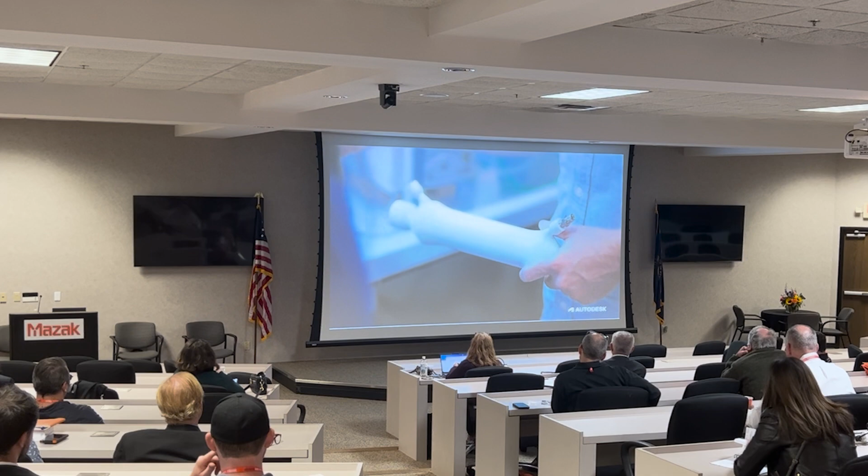That shows a little bit of the breadth of the company. The other reason I started with the video is that early in my presentations I also have to show this—it's not quite as fun, but I'll put it in layman's terms, what makes sense to me: it's the Autodesk Safe Harbor statement. Basically, it tries to keep our salespeople honest. As a company, we want to be transparent about what we're doing, but we also can't sell futures. So it's this interesting balance between being transparent and not having somebody buy something that's not yet built. All this means is if I tell you something about what we're doing or share an opinion, it's not a commitment on Autodesk's behalf. It also means you can ask me whatever question you want, and I can answer it, because you just saw this slide.

So I hope that we keep this conversational. It's a good way that we can stay transparent and also make sure that we don't end up in jail for selling futures.

Okay, so Autodesk—I told you a little bit about Autodesk, and I really don't want to make this an Autodesk commercial, but it's hard because all my slides have Autodesk stuff in it. I think it will refer to the software industry in general and show a little bit about our perspective, because we have three major verticals at Autodesk.

The one that people with more gray hair would know us for is architecture. It's how I used AutoCAD in high school probably. That's certainly where we started 40 years ago and have a significant amount of market share there.

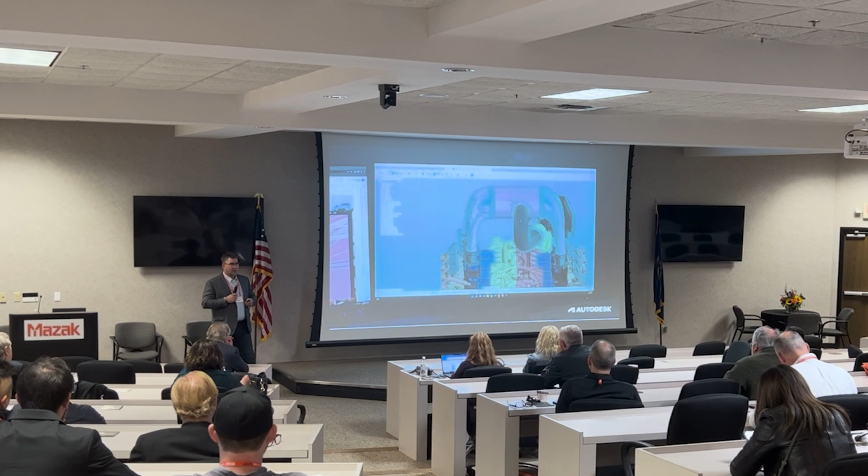Whenever I think about change being disruptive, I think back to college drafting, where I actually got my worst grade in college—which is weird because now I work for Autodesk. So many strange things in my career went ways I didn't expect. But that drafting teacher told me parametric modeling is the worst thing that ever happened to the draftsperson. And to some extent, he was right.

If you didn't want to change, you'd spend your life figuring out how a front, top, and side view line up with each other. But with parametric modeling, the world started to change, and draftsmen started to think about their design intent and how they captured it—we automated away the creation of the three views.

So each time there's a step in automation, it creates an opportunity for us to do more. That's a challenge—for some people it's exciting and you can attract new talent, for others it's a fear we have to get over.

The video I showed here was a bunch of guys who loved racing, and the fact that the product was more accessible was a change in their industry—they were able to design their own products for racing. In the background there's a Hooligan Pikes Peak car they did using Fusion. So it creates this new opportunity for new people to get involved, and I think it's an exciting change.

This one's kind of a funny one for me.

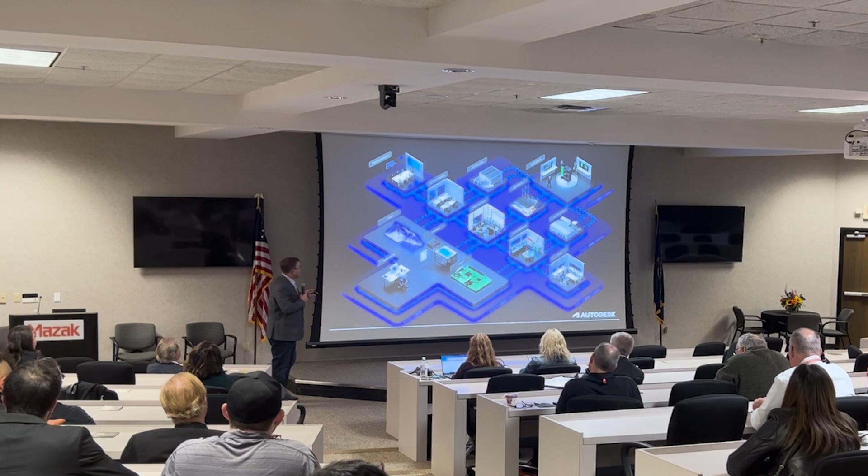So this is kind of the perfect world that we see. It's the one and done of the software world. Can everything be talking together seamlessly? The reality is, it's not.

This is what the world looks like today. Some of these products are ours, some are other people's, but as an industry we basically said, here's all the parts, figure it out on your own. We spent all the time making the toolpath that would do the fanciest thing and having the simulation that shows when something's bent or broken, but we didn't really put the effort in we needed to fuse the pieces together, to play on the name that we've got.

So this is the world as we see it, and we're not alone in this. Many of these players, and you're seeing acquisitions happen all over our industry, so I'm not saying it's just us. This is just my slide view of the software world, of these disconnected processes that we feel need to be connected together.

So like I said, that's why we built Fusion. How do we bring all of those experiences together into one thing?

Now, the interesting thing is building software, again, is like building anything. Each of these products, if you asked a machinist what's the right way to make a part, every one of them, including me, will give you a slightly different answer, and will all be right. The same exists in software.

Each one of these products on their own had the right way of opening a file and the right way of navigating a view, but when you say you want to pull it all together, often the biggest challenge is, I shouldn't call it a people challenge, but it's a problem with getting people aligned. The tools are often the easier part of the problem. I think you'll find the same thing with any of the challenges you have in trying to integrate things together.

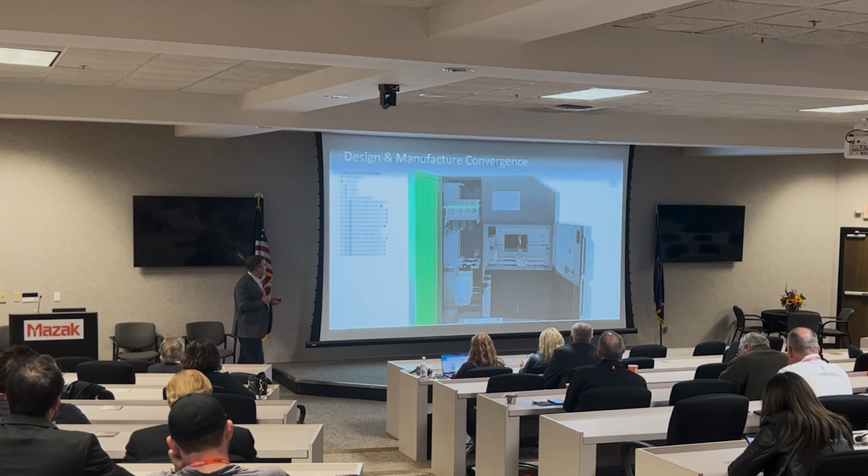And then finally, there's the product. So I'm going to start talking about product a little bit. And here should be a quick video just showing how we've started to connect CAD and CAM together.

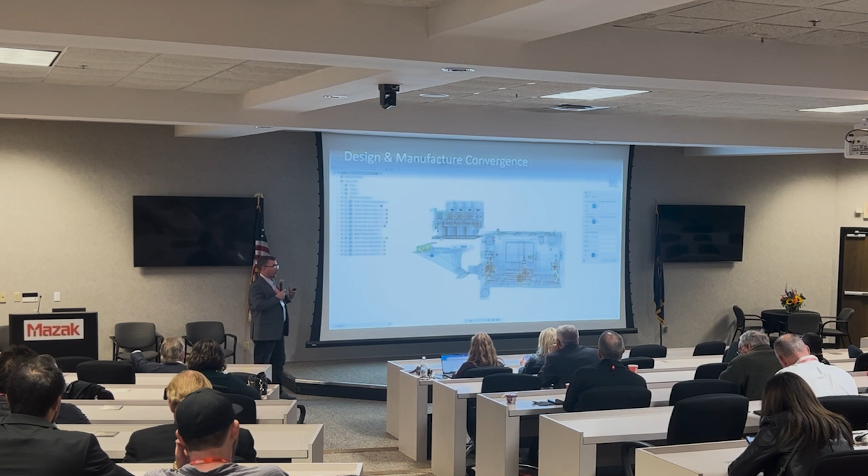We have a belief that it shouldn't be a closed garden. So what you're seeing here is CAD documents from many different vendors. It's a belief of ours that people are going to use many different tools. We understand that, and we hope that if you use the full platform, you'll have a better experience.

And the same thing—I don't think I'm out of turn to say it's the same for Mazak. They know you're going to have other machines, but you'll certainly get a better experience if you're connecting all of their tools together.

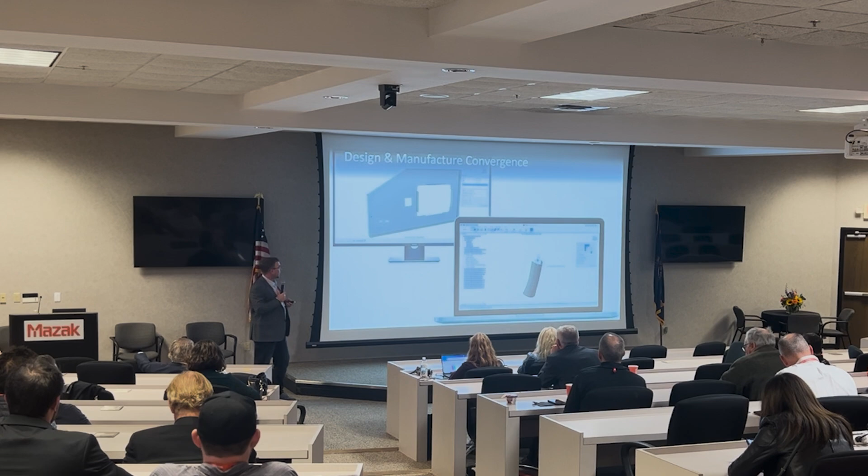Okay, so let's get into some of the challenges now of connecting these products together. Because in any change, you're looking and saying, well, I think of it from a product manager's view—where's my leverage, or what cookie jars can I reach into?

And I've got many now. Autodesk has acquired many products for me to reach into, each with their own strengths. I joined at the time of HSM Works, and the strength of that was saying, how do we parametrically connect CAD and CAM together? What do I mean by parametrically connect CAD and CAM together?

It's about saying, how do I define my intent, not what I'm going to do. That's kind of the AutoCAD way of doing things, where you explicitly define things. But how do I capture the intent of what I'm trying to do? And that's what that was good at.

And it starts to change the way people work even. I'd be curious how many people put their work offset on the top of a part. You have this debate all the time, and you think, well, why do you put a work offset on the top of a part?

Typically that's because when you program by hand, you wanted to avoid accidentally going into the part, so you've built these muscle memories and habits around avoiding the thing where something might go wrong. With something parametric, where the toolpath will always retract above the part, that's no longer the biggest problem. The biggest problem is, did I put 0 in the right place?

So it's actually now better off to put zero at a common point in a work holding solution that might even be below the part or at a fixture, because the operator setting the wrong zero is the more likely mistake than the programmer accidentally typing in the wrong value.

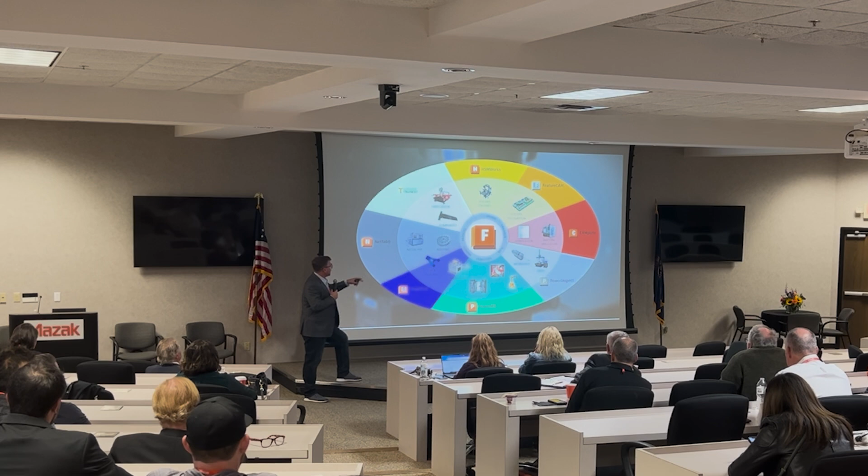So we start to change our habits when things change. But each of these products has strengths. Each one has a simulation product. So I think of this as putting a puzzle together, but I've got many of the same pieces. Every one of those CAM products has machine simulation, but as an industry we didn't finish our job. There was actually a company that made a joke on it, called themselves CAMplete, because the CAM company didn't complete our job.

We ended up acquiring them, and we're using the basis of that technology to run simulations. Say those are puzzle pieces we do want from other products. PowerMill is good at milling, and other products are good at other things. So here's a quick video showing how we've started to integrate many different processes together.

And what you'll see in this video is some 3-axis toolpaths, some 5-axis toolpaths. Some came from one CAM product, some from another CAM product. Metrology that came from a different CAM product. It's all seamlessly together in the same browser, and you can output it to any kind of machine type. So the goal is to say, how do we break these puzzle pieces down to their core bit so that it's more scalable?

And I believe the same thing happens no matter what you're making. We're just doing that in software, but to me, well-running shops have done that with their work holding and tooling. It's this idea of saying, how do I break things down to the root of what they are so I can put things back together? And now we start to see the benefit of what we learn when we take technologies that existed for another industry, in this case fabrication.

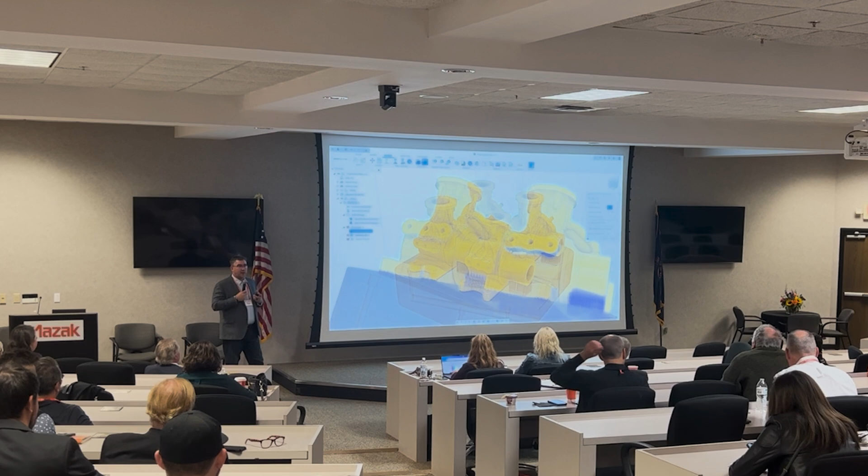This last one is just showing a little bit of additives. So this has started to push our muscle memory to say, how do we start to think about geometry manipulation? Because I had a conversation, I think it was Chuck, maybe somebody else. To me, all additive is a 3D or a digital casting almost. Think of it as a near net shape that's going to get the thing in the right place. So you're doing a lot of the same things as if you were designing for a forging or a casting.

It's just you can do it in a digital way and not have to build a mold. It's good at building a shape, but when you get high accuracy, it's very slow. If you get a fast 3D print, it's not as accurate, but you can machine it. So now you can see again how we've stitched together different technologies. It's our idea, one and done - how do we put the different technologies for CAM together?

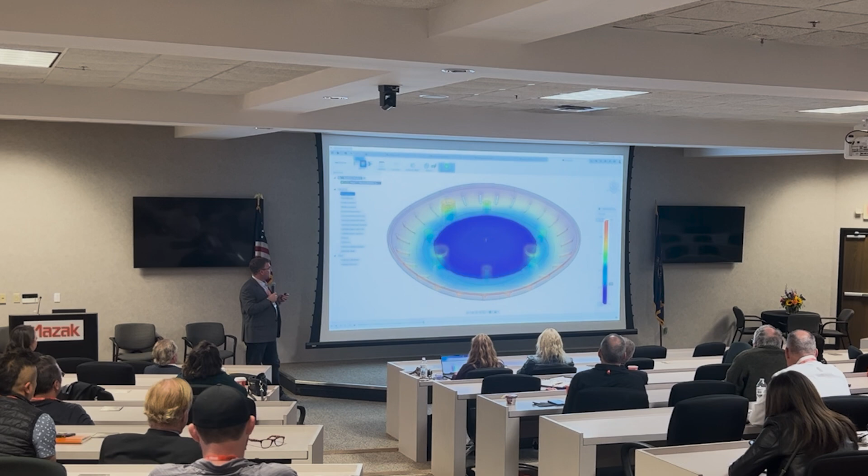Simulation's an interesting one too though. So I'm going to show this video only to have you think about, in your shops, when you're bringing different technologies together, sometimes you'll have an aha moment that says, well, we've got this tool that tells you when it's broken, and the same applies to machine simulation. Why do we even do that? Instead of using the tool to tell you when it's broken, why not take the same inputs of where the loads are, but just generate the geometry that will work? So sometimes you end up deep down a rabbit trail of fine-tuning a problem when maybe all the math you did will solve the problem in a better way.

So this is generative design, and it's going to create some shapes. Today we can make it so it can constrain to cutting or machining.

So it's one of the benefits of bringing these tools together is we also get to educate our CAD teams to tell them how to build products that are more manufacturable.

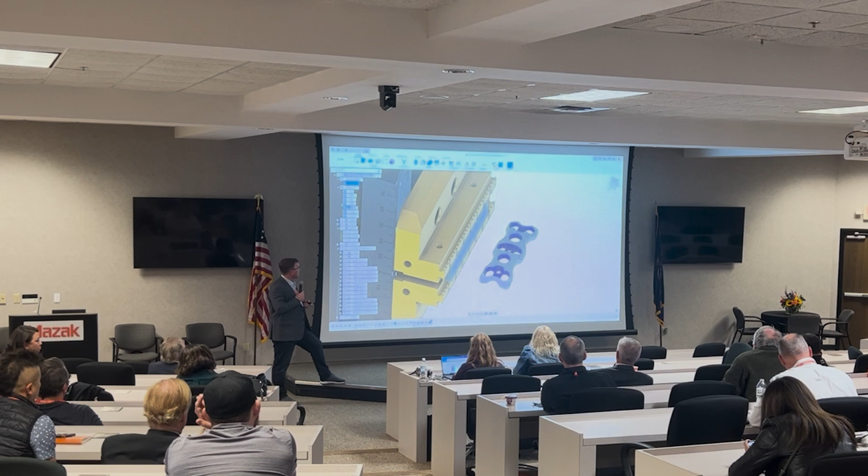This is my other little tip and trick, because usually people see generative and they think, well, that's really weird looking shapes, I never do it. But the creative machinists start to think, well, how would I use that tool differently? Every one of us creates weird geometry to hold a part for one and done type workflows.

It's actually a great geometry creation tool to create some geometry that you would just cut off anyway. So thinking about when we gave you access to a tool you didn't have before, that's what we all do as makers at heart, is how can I use this tool in a new and creative way? It's just a thinking to constantly be looking and finding creative ways. I think the people that find this are usually not traditionally from manufacturing, so that would be my encouragement for you. If there's younger people in the shop, they're more likely to look at things from a different perspective and find new ways of using tools that were built for a different reason.

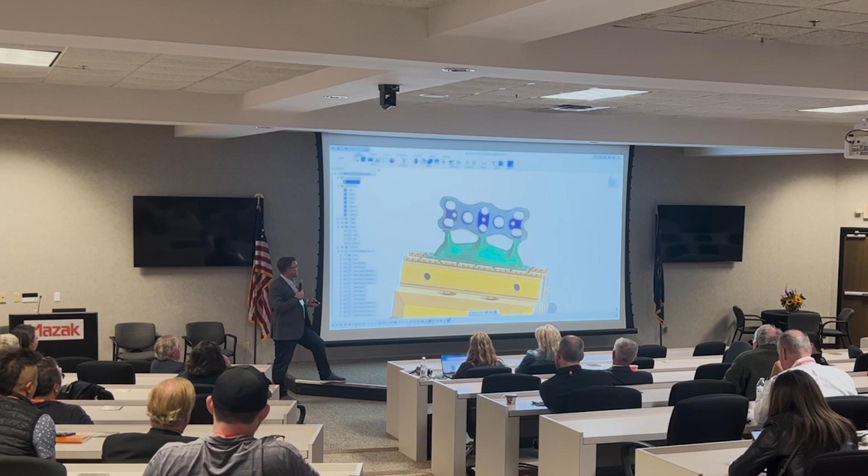All right, well, I've talked a lot about how we're trying to help automate your workflows. This one's a fun one we've done with Mazak to connect directly to the machine control, and at first help us dial in the post-processor, but long-term, our first process was how do we connect CAD and CAM. Now we're talking about how do we connect from CAM to machine tool. Because at the end of the day, all a CAM system is a way for a user to find geometry and apply manufacturing parameters to it.

So the geometry problem is connecting to a CAD system. The manufacturing parameters really come from the machine. The other thing it's done for us, and I think this is the interesting thing and the scary thing about automating.

Post-processors in our traditional CAM business was 15% of the revenue. So that group, before we came together, said, well, we can never give post away, it's too much revenue. And we kind of said, well, we can't afford not to, because it gets in the way of 100% of sales. So as we automated it and gave posts away, we didn't lose the post team. We freed the post team up to do more innovative stuff like this, which is a lot more interesting for them than writing onesie, twosie post processors.

But it's a bigger challenge. So as you automate things, my personal opinion is you don't solve the skills gap, you enable people to do more, and we're going to keep trying to push things forward. In our case, it freed up a team of post engineers to push the ball farther, and in this case, we're able to partner with Mazak.

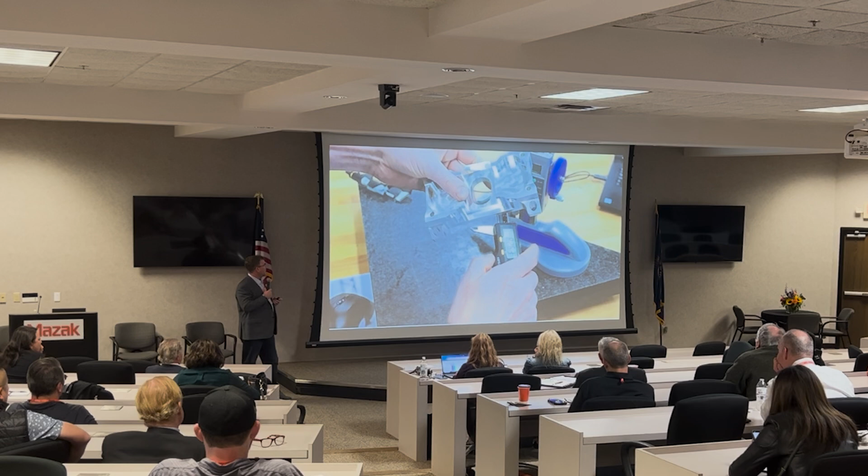There is a piece here too that I just thought I'd show, is thinking, because we live in a world where not everything's the new shiny stuff. We did the technology to measure on a machine tool, but in many cases there's simple things like Bluetooth calipers and that kind of thing. So within the same framework, in the same way you define how you want to capture a measurement, what device you use is independent of defining what measurement you want to capture.

So in this case, I'm just showing how you might use a Bluetooth caliper. And again, the thought is really to think about what is the general thing we're solving, and then where are all the other ways you might grab an input.

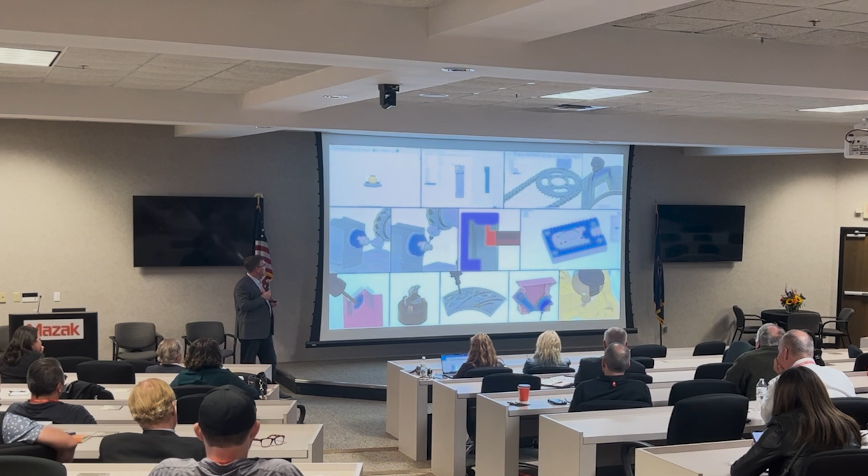All right, a couple little things on what's next, just in case you're interested. I usually show this only with our community, but Mazak invited us here, so I thought I'd tease a little bit about the kind of things we're working on, specifically a big focus on turn mill for us this year.

Automation is always a topic, so I'll share our belief on automation. It runs alongside a human, so this is a prototype that we've got now, where the user outside of the authoring client, so in this case they're in a browser, they're applying a cutting manufacturing method, I call it a recipe, but a method of manufacturing a component. You can apply that. The toolpath will generate outside of the user experience, but then the user can later open that toolpath up and take a look at it in the full client as if a user created it.

So far everything that's happened here is largely without user intervention, with the exception of saying this is the template that I want to use to run it.

And then later in the video, we'll open that up in the full experience to have a user fully go through that. And I think it's another important thing is as we get closer and closer to automation, you still need users, but the users are no longer doing the menial tasks. Now the users are kind of running alongside the thing that's automating them.

I think this applies to almost every industry. Chuck and I were chatting, I think it's your son that's a pilot, right? And as we got autopilot, there's not less pilots. The pilot doesn't have to do stick and rudder skills anymore, but now the pilot's thinking about navigating and avoiding weather patterns and thinking about a higher order problem.

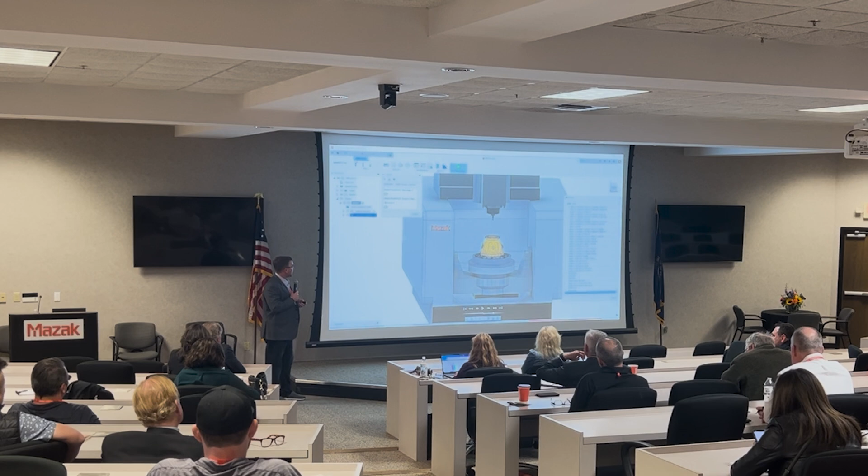The last thing that I'll think about, and I think this is the thing that's exciting for me, we're starting to see that with a cell, but as we automate more manufacturing, where do we think things are going? Well, the more we automate what's wrapped inside of a sheet metal box today, we call that a machine, it's starting to become a cell, and we're seeing cells out there with a machine and a robot, and maybe an Equator sitting next to it.

And so that cell is now the thing you're thinking about programming. And beyond the cell, then you're starting to think about how do I run the entire factory, and that's where we start to see more of the Autodesk pieces converge with how the factory is designed and how we start to run things inside the factory.

And the last one, and maybe this is a little bit of a plug, but education is obviously important to us. Anything with an Autodesk logo on it's free for educators. We can do that. In our case, cost of goods sold for software is zero, so there's no point getting in the way of having students be able to use the products. So any Autodesk product, I don't think there's any exceptions to that, is free for students. All they do is show their student card.

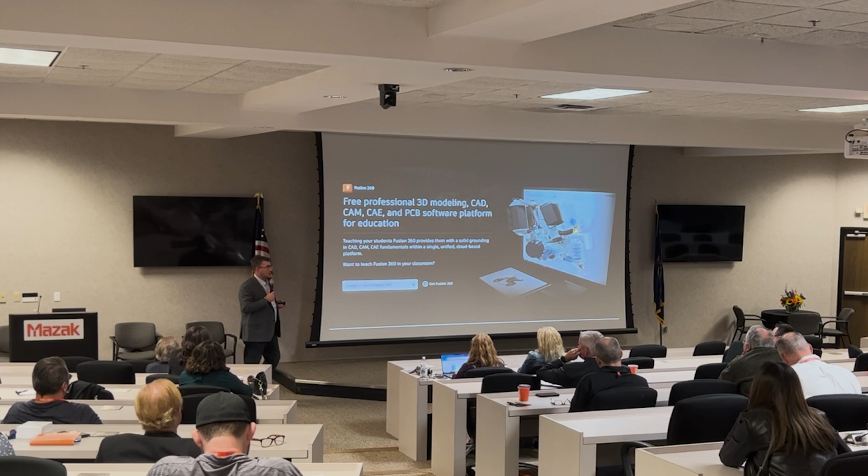Okay, well, I hope that kind of wasn't a sales pitch. Maybe it sounded like it. But the idea was to sort of express what we've gone through with driving a change that I think many of you are seeing in terms of Fusion being nowhere in the industry to a significant player now. Some of the things we've thought through, have we done it? I'd love to have some conversations about how it might apply to you, or really any questions.